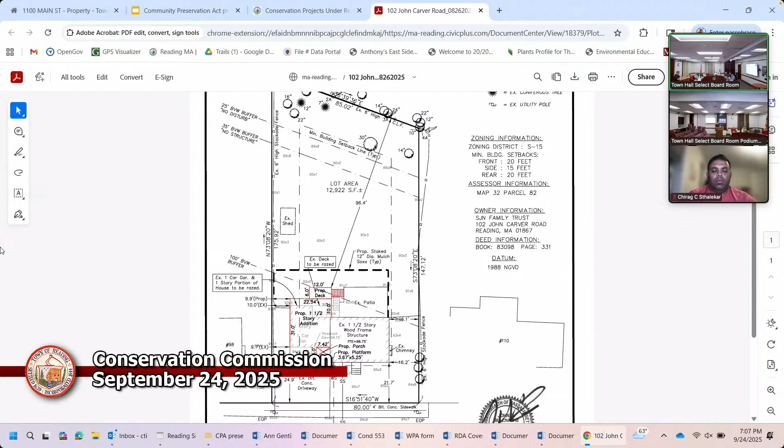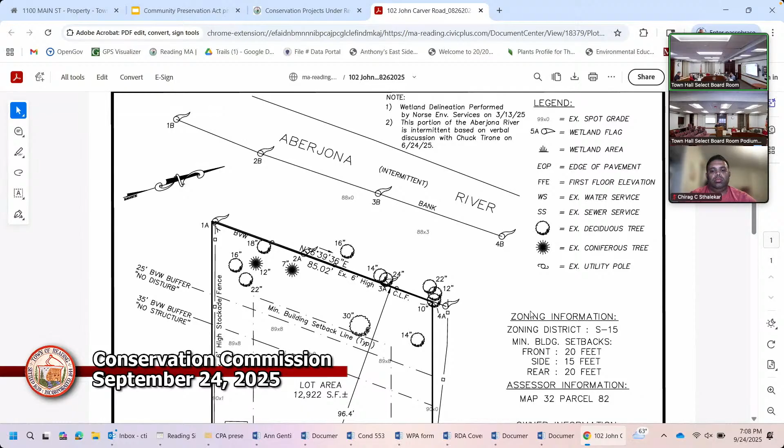Okay, for the record, my name's Jack Sullivan. I'm owner of the Sullivan Engineering Group. This RDA is in front of you for 102 John Carver Road. Norse Environmental performed the delineation. There's bank flagging and BVW flagging for this project. This does abut the Aberjona River, but this portion of the river was determined to be intermittent under past filings. So our work is really just, we have a small amount of work proposed within the 100-foot BVW buffer. There's a proposed deck with steps, and we're a little over 96 feet away from the bordering vegetated wetland.

With this project, there's an existing single-family home that's outside the 100-foot buffer zone with a one-car garage. The one-car garage is going to be demolished, basically in the same footprint, but slightly larger. They're constructing a 1.5-story garage with some living space above it. This project did go before the Zoning Board of Appeals, and the owners did receive a special permit from the Zoning Board for approval. So as I stated, basically the entire addition is outside the 100-foot buffer.

There's a small portion of the deck and steps within the 100 feet. The backyard is relatively flat. I do show spot grades. We are proposing a 12-inch diameter mulch silt sock to be placed at the limit of work line. There's no trees to be removed, and no grading changes within the 100-foot buffer. So I think at this time I'll turn it over to the commission. I know you were on a site walk, to see if you have any questions on the project itself.

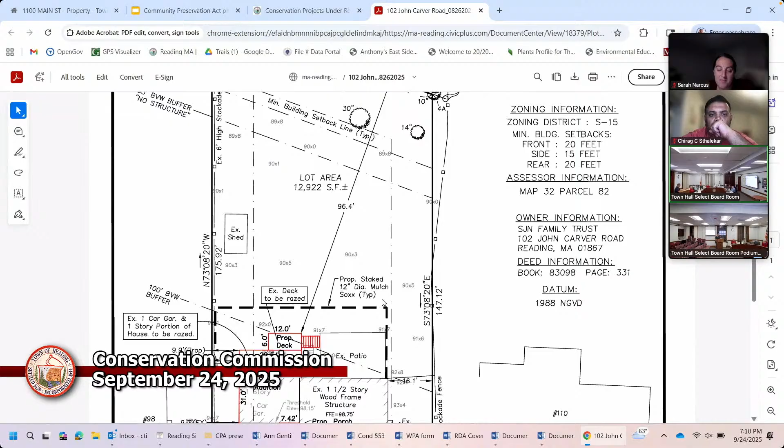It is a big flat yard, so we don't have a lot of concerns about erosion from the project. We did make note that the 25-foot buffer zone contains a swing set and a tree house kind of structure, and there are not supposed to be structures inside the 25-foot zone. There's also a pile of grass clippings in the corner of the fence near flag 1A, behind the 16-inch tree in that back corner. And we also noticed that if you go through the gate to the shore of the river, there are some piles of leaves and sticks and a remarkable fallen tree that goes across the stream there with an enormous root ball behind it.

I would suggest that part of the conditions for the project would be to remove the grass clippings and the leaf piles down to the point where the leaves are starting to decompose, and take them to the compost center instead.

I would propose that when the children have outgrown the treehouse and the swing set, or when the family puts the house up for sale, whichever comes first, those should be removed at that time.

I had a couple of questions. One is, where is the construction entrance going to be, and where are the stockpiles of soil and materials going to be? The construction entrance will be the existing driveway, they'll use that for access.

The soil stockpile will be near the garage. I don't think it's a full basement, so there's not going to be much excavation. I think they'll remove materials from the site since there's not much room to stockpile. If they did have to stockpile, it would be in the front yard outside the 100-foot buffer zone.

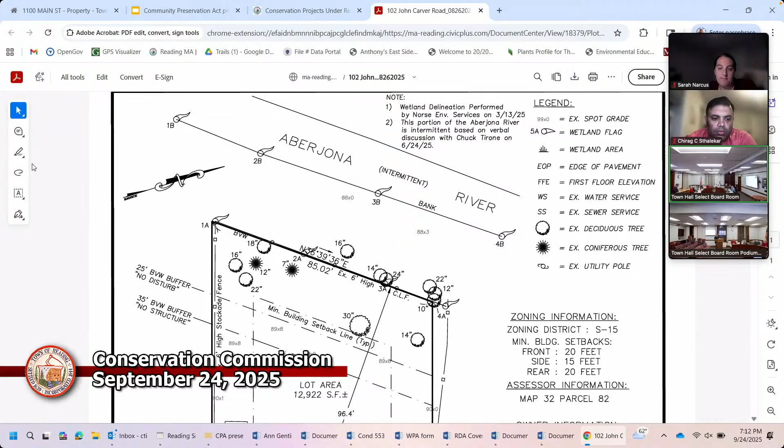And is that where the materials will also be stockpiled, in the front yard? Yes. Okay, anybody else catch anything I missed?

If I remember correctly, there was no true foundation for the garage area, which is why they're rebuilding. That's right, so there has to be some excavation of some form. Yeah, they'll excavate down, they'll put in a frost wall with a footing, but that's half the reason they're taking down the existing structure, because there's no foundation to it. Then you'll remove as you go. As we go. Okay.

I would just add, are you concerned about groundwater? Do you think that's a concern here? No, no.

We did notice that the downspouts for the house currently, one goes onto the driveway and one goes sort of next to those proposed steps, onto a gravelly area there. So they don't currently have infiltration from the downspouts, it just goes onto the ground. But it's a big, long, flat yard before the water would get to the stream. The slope kind of goes down a little bit from the house, but then kind of rises heading towards the stream.

So do you have any plans to infiltrate the roof? No, I talked to the owner about that. It wasn't in the budget, they just had a baby, a baby boy. I know their budget's tight even to do this. So I said to add infiltration would be $5,000 to $10,000, and I said you're outside the 100. Typically with the commission, if I'm inside the 100 with an addition, I always show some type of infiltration, but on theirs, since we're outside the 100, we weren't looking to do that.

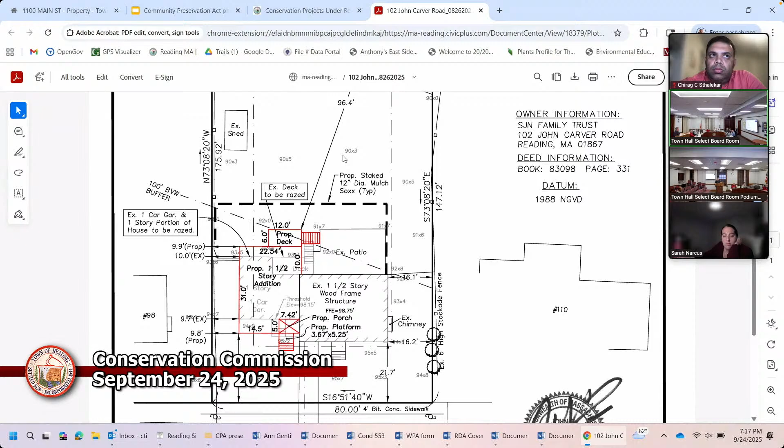I think we don't need to nitpick where it is. If you can find an appropriate place for it, I think that would be a positive addition to this plan. I wouldn't agree that we need to micromanage it now, just remove the 'if' and find a place for it. So if we say we're going to find a place for a rain barrel, and that's a condition, Sarah, does that work with you if we find a spot for the rain barrel? Yep, that's not a problem.

Any other questions from the commission? Chuck, you have anything? I don't have any questions.

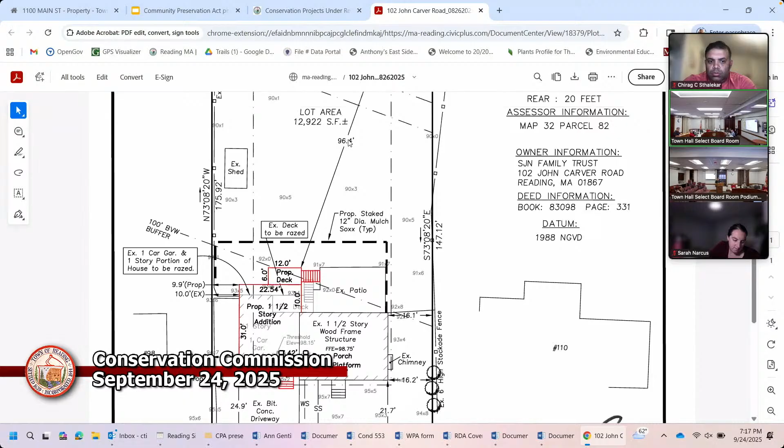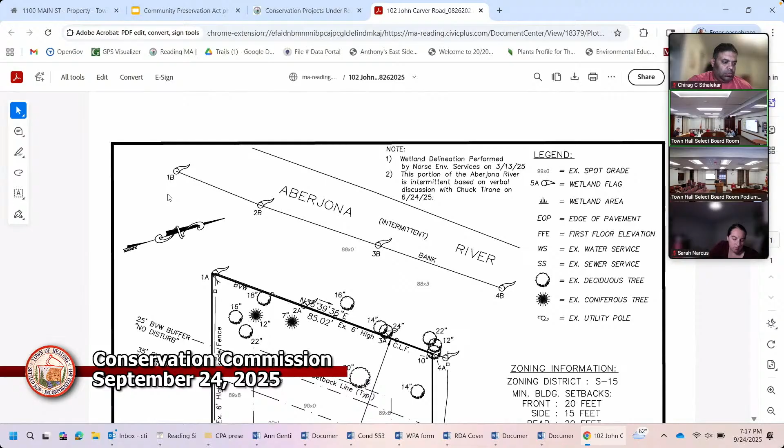It just sounded like there was a gate in the back, and you said that the pile of yard waste was over by flag number 1A, inside, just inside the corner of the fence, that acute triangle right there. Inside the yard, that's grass clippings. It's actually, and behind the gate is leaves. Right, on that one inside the gate, it's a very tall pile. So we were speculating that maybe it was some kind of compost pile as opposed to just quote unquote yard waste. The leaves, I think, are yard waste.

They're outside the fence. But Sarah, can you tell us what the pile inside the fence is about? Yeah, of course. So the root system for that large tree that is tipped away from our house, it falls, it goes right there. And so that fence was a bit of a challenge to place, but that was pre-existing. The mounds back there were pre-existing when we bought the house six years ago. The clippings were definitely new, we're just finding a place to compost those, but open to other options if that's the preference. It was mounds from the roots from that tree.

Okay, so based on that, I would say that there needs to be a condition for removing the top layers of the leaves outside the fence and removing most of the pile to the left inside the fence, again, down to where it's already disintegrating.

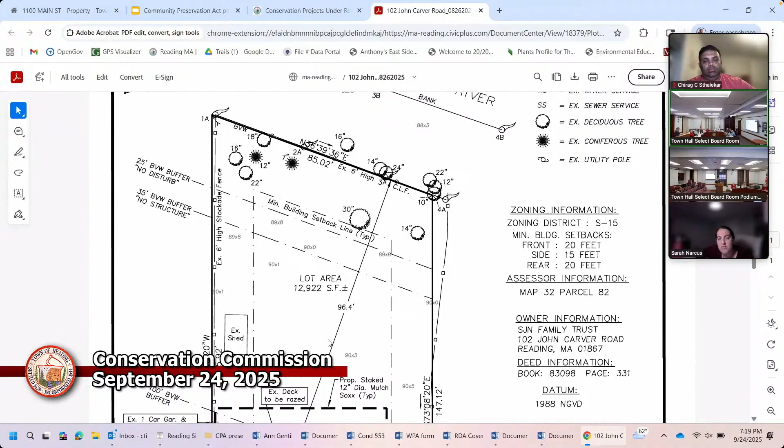No, I'm satisfied with this project. Most of it's outside the 100-foot buffer zone. There's only a proposed deck with no roof and some stairs within the jurisdictional area, and the erosion control seems appropriate. So I'm satisfied. Does anybody in the room have any comments or questions? Anybody online have any comments or questions about this project? Just use the raise hands function, the reaction button.

Seeing none. Okay, Martha, if they wanted to have a compost pile, I presume it would be okay to have it on the other side of the 35-foot line? So they could have a compost area near their shed, for example? Or does it have to be outside the 100-foot?

No, I mean, it's up to you. I don't mind if people use a small area of their property, but a compost pile can't just be a pile that's not contained. It should be within a fence or a compost bin or something like that. But to answer your question directly, I would say yes, by the shed, that's on this side of that slight rise. So I think that would be perfectly safe, if they wanted to have one.

Okay, can I have a motion to close the hearing on 102 John Carver? I move to close the hearing on 102 John Carver. Walter Talbot seconds that motion. Chirag Sthalekar in favor. Walter Talbot's in favor. Michelle in favor. Gio in favor. Martha Moore in favor. Brian Bowe in favor.

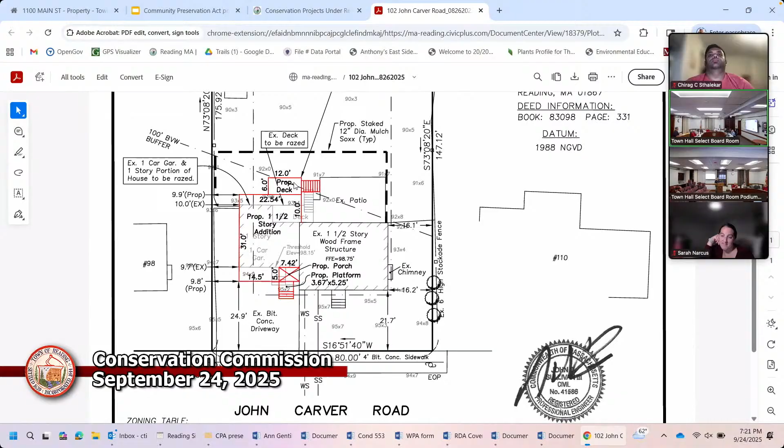Okay, this is an RDA, so can I have a motion to issue a negative determination for 102 John Carver? I move to issue a negative determination for 102 John Carver. Walter Talbot seconds that motion. Chirag Sthalekar in favor. Walter Talbot's in favor. Michelle in favor. Gio in favor. Martha Moore in favor. Brian Bowe in favor.

You're all set. Thank you. All right, Jack. Thank you.

Thank you so much. You're welcome.

Okay, so next is our first discussion item, 259 to 267 Main Street. As I said, we're not going to be taking that up this meeting, so that'll be on a future agenda. The next item would be the CPA presentation.

Is somebody here? Yep. Oh, I didn't know what I was looking for. Great, okay, the CPA presentation. Can you come up and introduce yourself, please?

We've got our slides down here. All right, I am now wearing my CPA representative hat. I am the Conservation Commission representative to the Community Preservation Act Committee. I'm Sandy Matapia, co-committee member, CPA study committee, and I'm the at-large member of the committee.

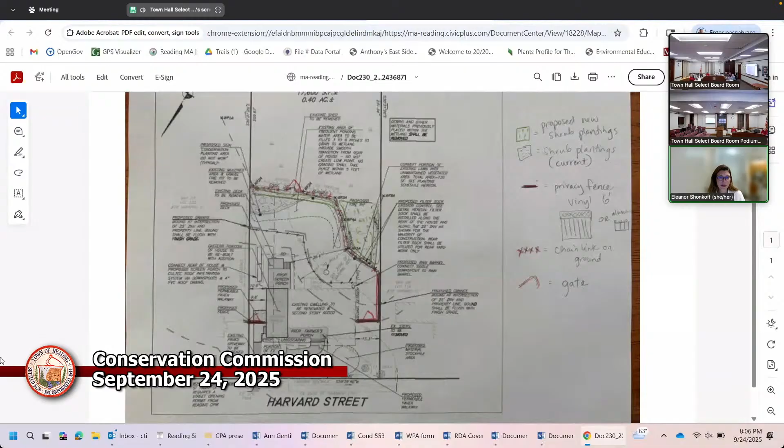So what the decision was by this committee was to do an underground infiltration chamber. We discussed that a lot with our general contractor. He says he can't recommend doing that because he would have to submerge the chamber in water in order to install it. We sent a photo from May 9th, and you can see that the water level is so high that there's not enough distance between the bottom of the chamber and the groundwater table. Also, the cost was $6,000.

Then we also discussed the option of, along the back of the house, installing downspouts and piping that water out under the yard to the edge of the existing wetlands. But he said during the rainy season, he was concerned that the water would back up the downspouts because there would be nowhere for it to go, and I think that's true whether or not there are holes in the pipe. He also said he would have to pump water out of the pipes, out of the hole, the trench, in order to install the downspouts.

So I feel like we've considered all the options that we can think of. What I'm requesting is a waiver, not to do the infiltration requirement, because I think the chamber or the pipe sitting in the water would impact the efficacy. And we're only adding the 4 by 5 new area, so it shouldn't be a significant addition of rainwater.

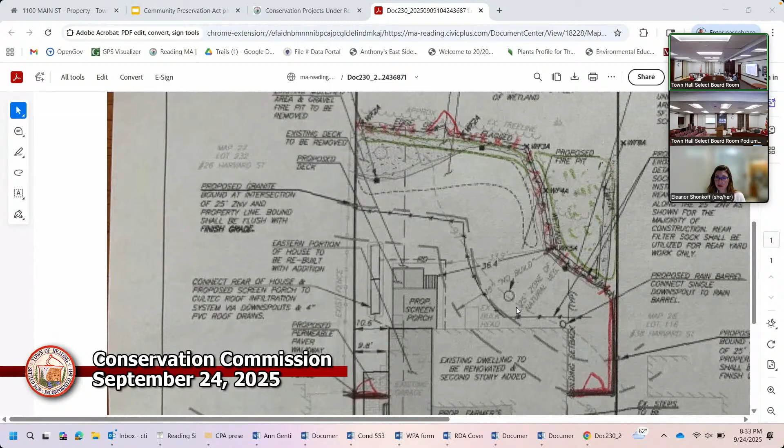Okay, on that note, so do we need to vote, or is this just administrative approval? Or is that what we're voting, is whether to make it a minor plan change or administrative approval for the fence and the planting change?

Right, that's your decision. So we have an order of conditions already. This will be added to it and picked up at the as-built plan section. And this plan will be part of the COC application. The decision rests on whether or not the change is significant to the interest of the act, to the wetlands.

So they're adding a fence. They're having the same or more plantings, just in a different area, and we're not deciding yet on the infiltration. Those two things, my opinion would be that they're insignificant to the interests of the act. So I would be okay with it being administrative approval, especially if we have an updated plan.

We're ready to make the motion. Do you want to make this motion? I will make a motion for administrative approval, or make a motion to authorize Chuck to make the decision on his own as administrator. You can mention the two items.

Override that and make a motion to allow the fence as long as it has that access for the turtles and squirrels to easily pass through and out, as well as rabbits. And a motion to allow her to change her planting plan from her initial spot to behind the fence.

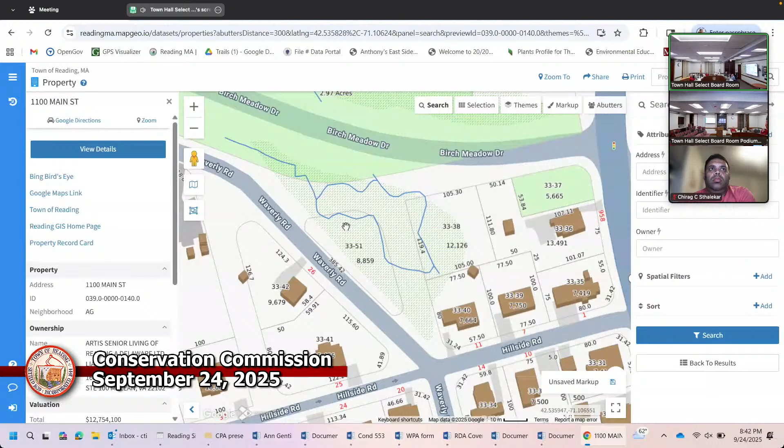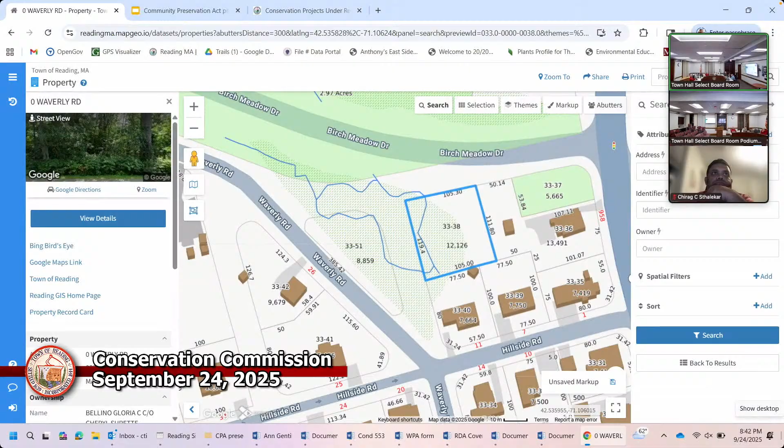That property owner only called up and inquired. She said a tree fell on our property from what she believes had been land that was supposed to be donated to the town, and she wondered if that had happened yet, or if it was something she needed to take care of herself. And I said I believe that has happened, but to reach out to the forestry department.

And I reached out to the forestry department myself and just let them know this was coming, and let them know this was a newly acquired piece of property. And I think Brian can take it from there.

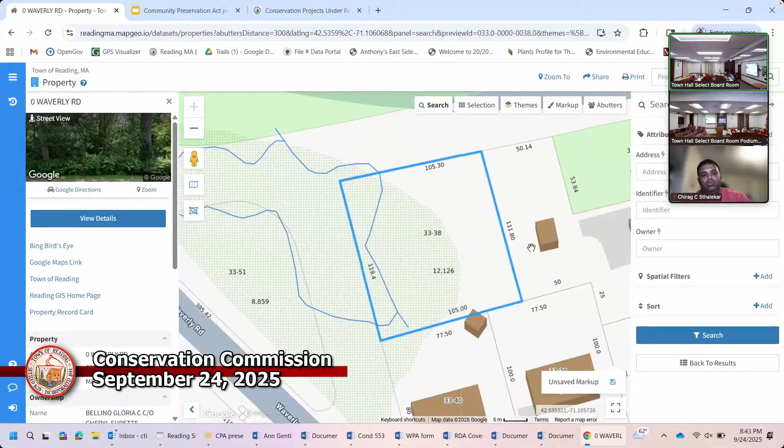At that point, the tree warden raised the question that in the future he felt he should have been notified and had some input on our accepting the property or not, based on the condition of the trees and what work might be incumbent on him in the future for the status of the trees. So we decided we would write a letter to the town capturing our thinking and our position on this.

That's the draft letter that Chuck sent around to the commission for review. That's what we're here to either amend or vote on, or what have you. But to summarize our position, there are like four key points.

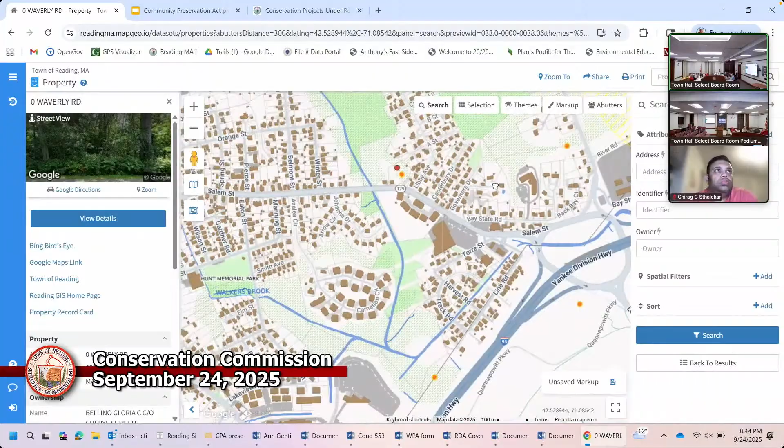The first is, as a precedent, we always try to accept land that's being donated. They're not making any more. Reading has less and less open space available, and it's incumbent on us to acquire at least an interest in the land, if not the land itself, to protect and preserve it.

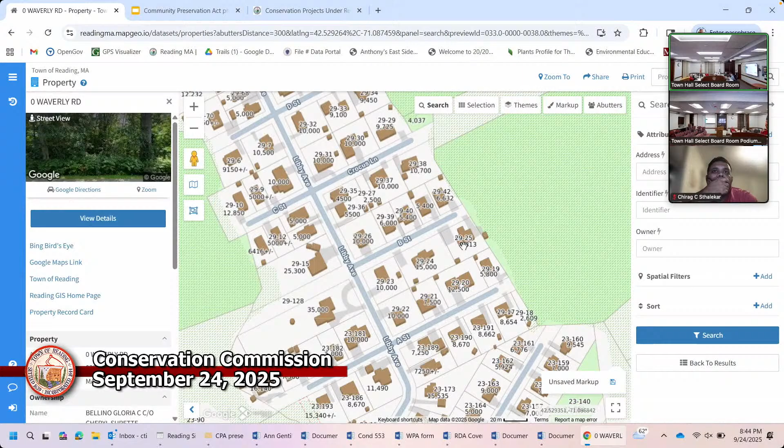This actually, if you read section 8C—have you ever done that? It's relatively short, although tiny print, but that's basically where the establishment of conservation commissions comes from in state law. It says, if a town establishes a conservation commission, here are the powers, authorities, and the point of it.

One of the things it emphasizes is acquiring and preserving natural resources. It also says that if we have a plan, as much as possible, it should align with the town's master plan. The second bullet in the town's master plan list of themes for their vision is preserve and protect open space and natural resources. So again, it's in line with the town master plan as well.

The next thing is that, going by precedent, we have never had to reach out to another department like that to get approval. Yes, when we accept land, it's at the approval of the select board, not at the approval of forestry or anybody else. So this is asking to establish a new precedent for no reason.

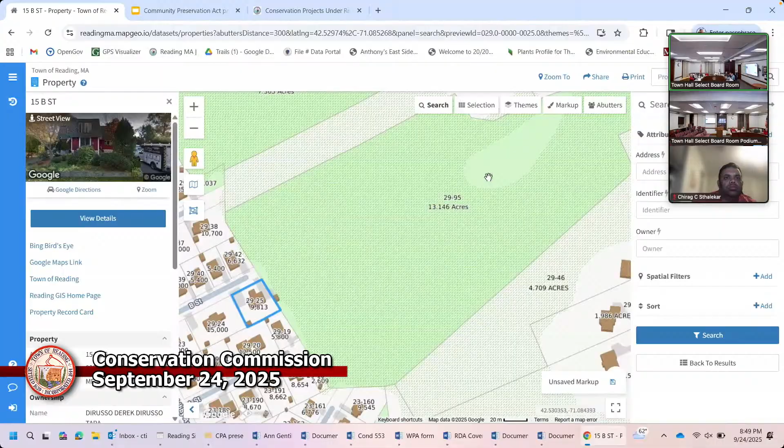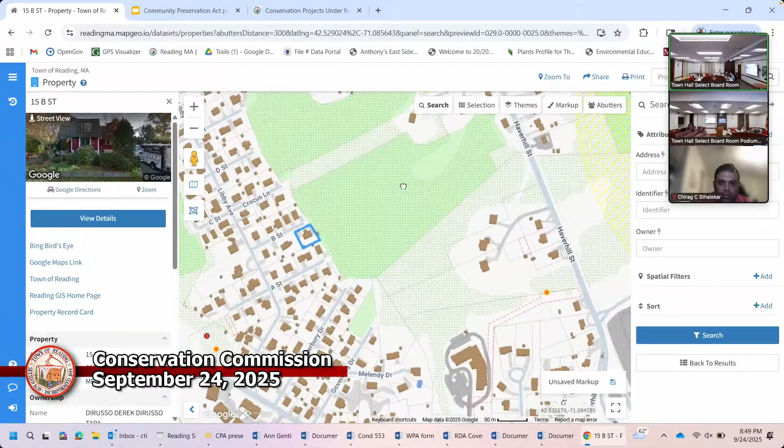Right here, we received this piece of land - this was 0 Haverhill Street. We received this piece of land from the owner that bought 0 Haverhill Street. This was a donation to the Conservation Commission, a big piece of property. I asked the DPW, before we get it, do you want to review it? I didn't ask Mike Hannaford, I didn't ask the Forestry Department. I asked Jane Kinsella, and she said no, that wasn't how they do it. So it's really never come up since then - the Conservation Commission got all this land and it didn't even come up.

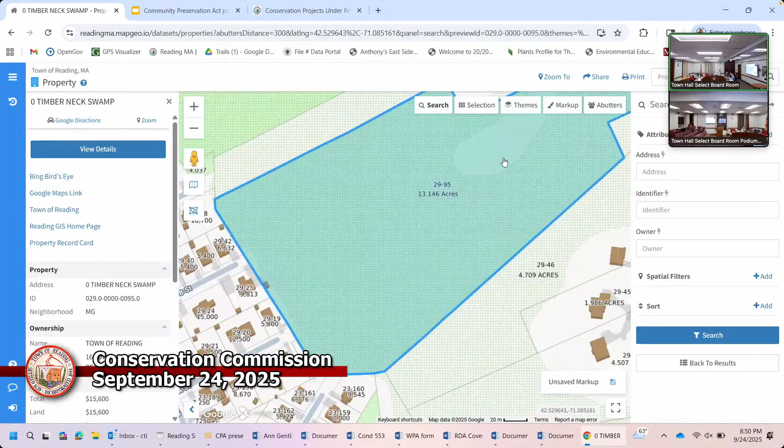So, given that context, what thoughts, if any, do you have on the letter that was sent around to you folks?

So really, the intent of the letter is to ensure that the Conservation Commission and the Select Board only has jurisdiction to define our regulations and what our procedures are - it's just our policy when it comes to accepting proposed land donations.

The one condition that's been placed on us recently by town counsel is that when we get a piece of property that's going to be donated, we have to get it surveyed ahead of time. That's a new restriction put on by town counsel, but that's the only requirement there is, above and beyond approval from the Select Board.

So would we accept land without doing a survey, or with doing a survey? We have to do a survey. What does the survey contain? It tells exactly where the boundaries are - it avoids any future boundary disputes.

Does it mark which trees are on that property by any chance, like similar to what we see with property? I don't know if they stake it out even - it's not a requirement, just a boundary survey.

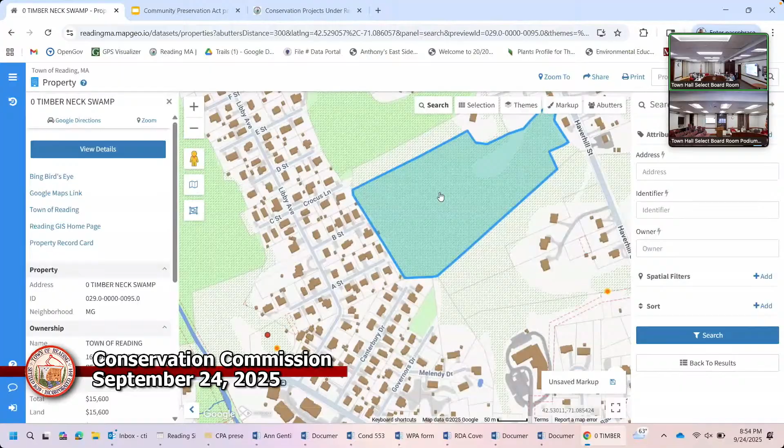Okay, got it. The only issue here is a tree fell from conservation property onto private property. Our policy says that the town will take care of the piece that's on the private property, leaving the remnant on conservation land where it fell. That's a policy we agreed to, but how the tree warden treats trees on conservation or public land and their encroachment onto private land is his decision.

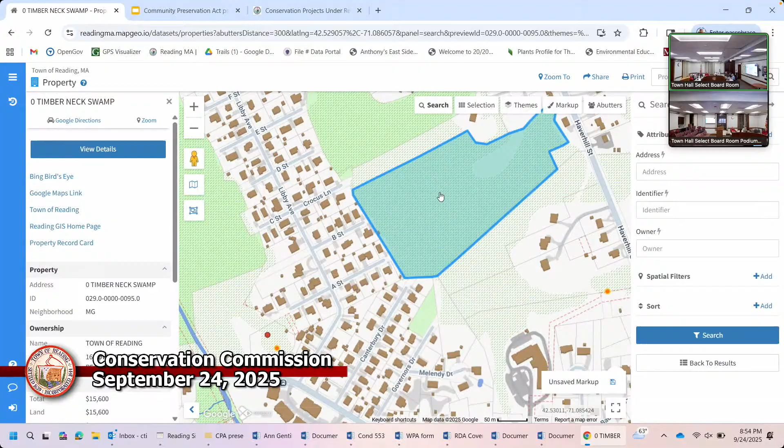We worked that whole policy out back when I was first on the commission, so we're talking 2020 or so - the whole question of if the tree is on conservation land and falls onto private property. As far as I know, one tree fell and, according to the policy, no one informed me of what actually happened out there.

According to the policy, they cut it at the property line, took away what was on the private property, and cleaned that up and left the rest on conservation land. And this is at Waverly you're talking about. That's at Waverly. That's what I would have expected to happen.

Based on our policy, the previous time that policy had to be enacted was 2020, on Mill Street. It's pretty clear. Mike understands where he's at and I understand where I'm at, and we reach out to each other when needed. It's a pretty clear policy. He's done a number of trees along the way that I never heard about because it was never an issue.

That's an automatic response. It's a very active forestry department, and when it comes into the conservation area, they'll reach out to me or follow that policy.

So this is just clarifying what our policy is on accepting donations. Doesn't change the tree policy one iota. Understood.

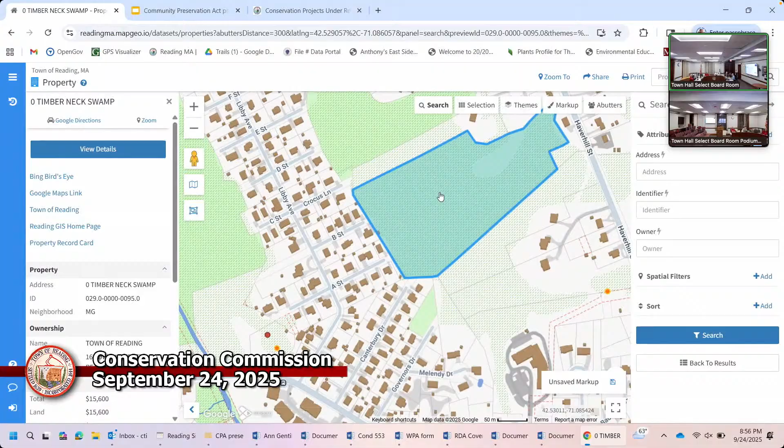So you're looking for our input on this. Do you want to change any words? Do you want to bless it as it is? Do you want to bring it here and start a bonfire?

I would like to possibly be the devil's advocate here and say I think it might be courteous of us to notify the forestry department when we are planning to accept a donation, so they're aware of it, but I don't think they should be able to stop us from doing it. Say we notified them, hypothetically, and somebody went and inspected and had pushback, then what?

Our goal is if there's land available, we want it. Maybe they would know that there are hazard trees that should be trimmed or cut down that are now our responsibility. I'm not saying we would let them tell us we can't take the donation, but maybe they would have recognized this tree as having a giant rotten spot at the bottom, and it might be better to get rid of this hazardous tree before it fell on somebody's yard, rather than after.

It's like an assessment, kind of takes the liability off us. Just a suggestion. You don't have to listen to me, but since you asked our opinion, that's what I would say—it might be courteous to let the forestry department know.